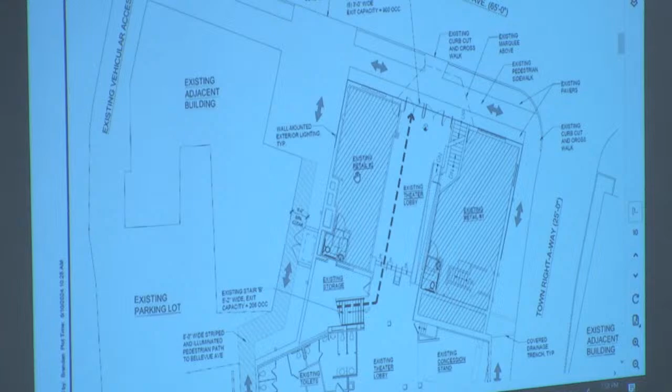So in the upper left-hand corner, that is the existing access to the parking lot in question, off of Bellevue Avenue. And on the screen here, hope you can see it.

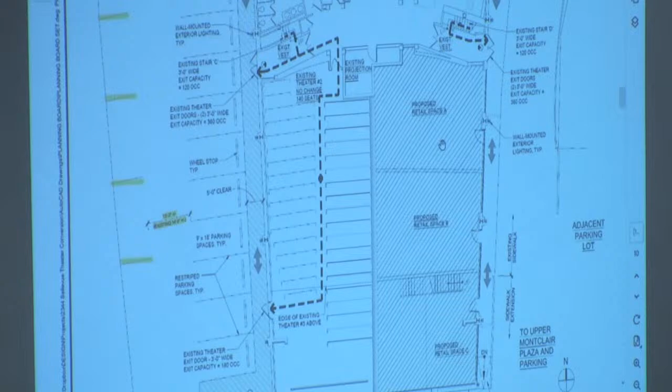So this is the edge of the theater, and the shaded area is the pathway that we have created by moving this parking spots over by 1.5 feet while maintaining the parking count and putting wheel stops and restriping the parking spaces. I believe one of the issues that we raised is that you can't have the parallel parking behind those 90-degree parking spaces. There's not enough, the aisle width is too narrow.

The existing measurement that we took out there was about 14.5 feet, and we're reducing it by like 1.5 feet down to 13. It's less than 15 feet, which, the township requires 24 feet minimum for 90-degree parking spaces. So the fact that the existing parking spaces may be provided with 14 feet, that's still not compliant.

If I may address that for a moment, we don't own that property, and we have no control over those parking spaces except for the ones that are by us. All I'm saying is you can't, I mean, it's actually less than 14 feet. A car cannot back out of those spaces without hitting the cars in the parallel. So I don't know if that's in your agreement with this parking.

Well, at the time we were negotiating the agreement, we were unaware of that. So I will certainly go back to the owners of that property and ask them about it. I would note that we don't require any parking at all. So if worse comes to worse, there'll be no parking, but I'm hopeful it would be better to have some parking for employees and residents.

I think the issue here is that not so much whether or not you're required parking, but it's that you're providing it. Well, I guess, should this board approve the application, we're basically signing off saying that that's okay, and there's no issue.

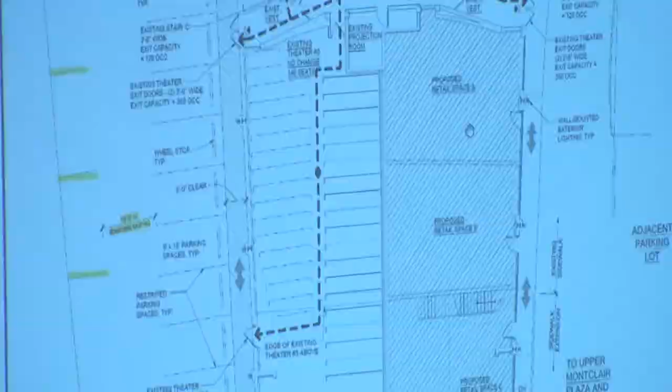Now, again, that agreement was reached prior to my being made aware that you wanted those parallel parking spaces removed. So I will have to go back to them and say that if they want to continue to park on our land and use those parking spaces, they're going to have to get rid of the parallel parking. And if I can't do that, I will notify the board that there will be no parking back there. That's all we can do. We don't own that property, so it is not for us to do.

I think I'm just a little confused. There appear to be 10 parallel parking spaces in the rear. Is that correct? I believe those are 90-degree parking spaces. There's what, 90-degree parking spaces, right? Yeah, these are 90-degree. And only then there's four. These are the parking spaces. Yes, there's only, I thought there was like 4. I think there's 4. Yeah, 1, 2, 3, 4. Okay.

3 or 4. So, but you're making reference to wheel stops. These are parking spaces as well. But can you explain it with the pointer so that everybody can follow along? Yeah, I was going to ask that, Janice, if we would put the pointer up there so... sure.

So this is one parking space, the 90-degree parking space, with these being the wheel stops along here. And then these are the parallel parking spaces in question. Our concern is vehicles entering or exiting those 90-degree parking spaces will not have enough room to safely back out or even potentially turn in without there being conflicts, as currently illustrated.

If the first space, for example, were left vacant, could you perform a K-turn using that? Or is the aisle width too narrow? I think it'd be really dangerous.

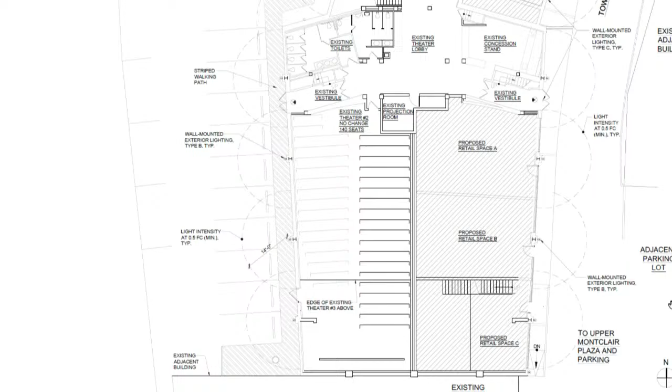With the parallel parking spaces there, at maximum there's 14 feet, and that's pushing it, and now we're talking about reducing it to 13 feet and change. And again, the town ordinance requires 24 feet, that's just industry standard. But to be clear, if they were to eliminate those spaces, we would not be in violation of any parking requirements.

I guess there's two options here. As Mr. Neiman pointed out, on-site parking is not required for the property if 50% or more of the building is used as a movie theater, correct? That's correct. And 50% or more will be used as a movie theater? Yes, correct. Okay, so this is more of a site plan issue.

I think it was created because the redevelopment plan states that there must be unobstructed pedestrian access outside of those doors. Now, the way you show it here, they show a 5-foot wide pedestrian aisle. The question I have is, do we need a full 5-foot aisle along the side of the building?

Well, I think they're proposing 5 feet, correct? We're proposing 5 feet. That's why we had to move the parking spaces back. Well, I'm just trying to be helpful, talking about options. So the options would be to reduce the width of the walkway, or to remove the parking.

Or, if you can, for safety, as long as we make sure that there's access where those doors are and pedestrians can go between the cars, it doesn't necessarily have to run along the side of the building. That way you can move the parking spaces closer to the building, but you have to design them so that you can get out through the doors.

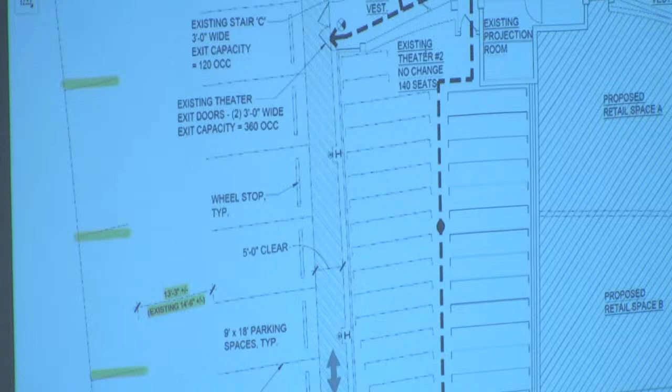Given how resident access is going to work, would there still be a pedestrian walkway on the top half, basically from the start of the parking, to give them an easier path rather than having to walk either through a darkened alley or around the other building through the parking lot?

There will be lights installed on the facade along the way here. Part of the access we created to link up Bellevue and the parking lot is to create this illuminated pathway. Perfect. Did you submit a lighting plan that shows that? Yes, it's on the following drawing, I believe it's A005.

Oh, that was not in the handout, I guess, because there's no changes to it. So, okay, it's on the screen here now. So there will be a series of lights here illuminating the path from Bellevue all the way to the parking lot on the west side.

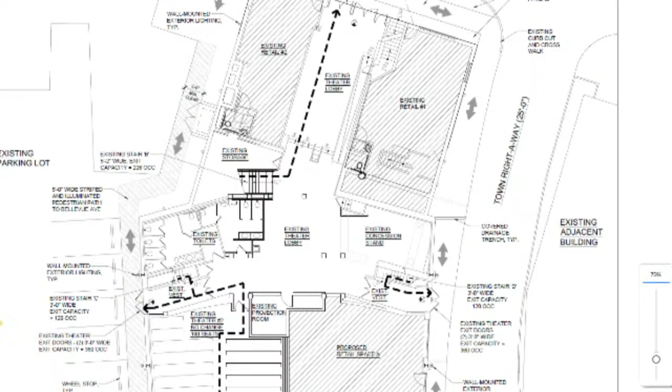So I don't think you've talked about the east side of the building or gone through the apartments. Should I just go over the drawings quickly? Absolutely, yeah. If you have any questions, just let me know. I know it's maybe a little bit hard to read on the screen.

So what you see here, this is the front of the building on Bellevue, and this is a stair that leads you up to the upstairs apartments, the 3 apartments that we're proposing. And then this is on the town right-of-way. This is the east side of the theater. What we are proposing is to put the retail space in what is currently Theater 1, opening up the walls to allow 3 separate retail spaces over there.

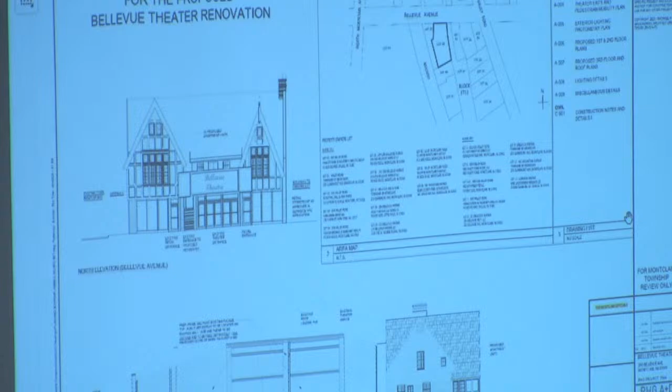We went over this with the HPC and adjusted based on their comments, as I mentioned before, maximizing the windows and putting a masonry bulkhead below the windows. This matches what is typical in that part of Montclair for storefronts. We also added these sash windows to match what's in front, to keep the same vocabulary.

And we noted the height of the lights, so they're all about 7 feet, more towards the north because the sidewalk slopes down, about 8 feet, right above the door. All the lights are at the same height, and all the lights are below 15 feet, as I previously mentioned.

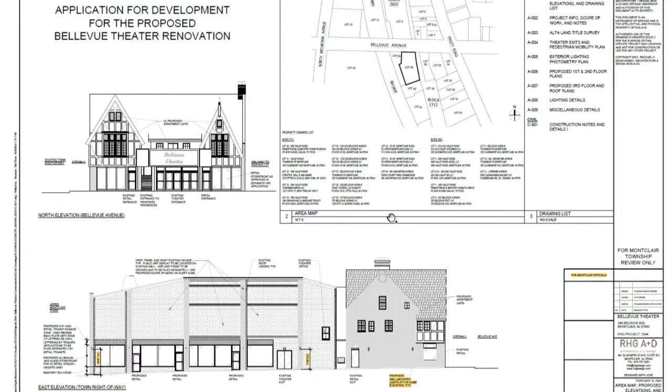On the second drawing, the only change compared to what we've shown before is we addressed Norberto's comment about where we're putting the snow stockpile, up against the building at the edge of the sidewalk, while maintaining a walkway for pedestrians. On the upper left-hand corner, this is where you can find the description for the mural and the proposed scope of work. Can you show the board members where the murals are proposed?

On the east side of the building, the future location of the mural would be on the facade above the retail spaces. I thought it was just one portion of that. We showed the entire facade to HPC back in April. So the whole thing's going to be a mural?

Yeah, or it could be a mural. Would it be flat? Because it looks like there are divisions. Those are existing structures that are separating it. So the anticipation would be that it would be flat for purposes of the mural? Yes, maybe it's up to the artist. Maybe they'll work all the verticals into the theme, but that's yet to be developed.

It's kind of a narrow driveway, so it couldn't extend out very far. I think the HPC, in previous iterations of this plan, had a lot of thought that it's a very ugly facade of that building. It's concrete block, and it would be preferable to make it a work of art. That was their suggestion initially.

That wasn't the HPC, but we agreed. I think we had seen previous plans with murals on the side of the building, and we had agreed that was a good idea. Yeah, I thought it was a great idea.

And by the way, the Economic Development Coordinator is willing to meet with you to talk about grants to do a mural program. Okay, great.

And the client's also interested in doing some public art on the other side of the building, the side that faces the railroad track. The iteration I saw had some concern that it might be a sign. Is that still under consideration? That was just for illustrative purposes.

This one might be a little hard to read. We put this in a couple submissions ago to show the circulation and how people can exit the theater, and to show that we have a continuous pathway around the building. The comments about needing to adjust the west facade are taken, so we'll make the update.

Which sheet is this? This is A004, the one we had looked at previously.

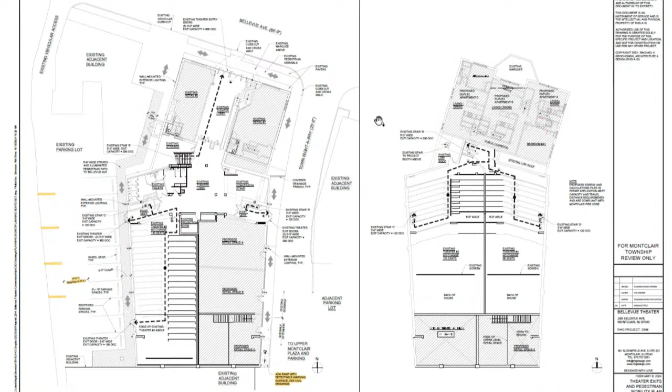And then the next one, A005, shows all the exterior lighting and the light level of each one shown on the plan. For the most part, we're meeting the township requirement of the 0.5-foot candle.

However, on the east facade, because the building's right on the property line, we'd likely need to ask for some kind of consideration here — a waiver, because there's no way for us to meet it given the building's position. And sorry, what was that waiver for? Just want to make a note — for the light intensity level.

Yeah, I believe the township allows a maximum of 0.3-foot candles along the property line. Isn't the maximum 0.5? But along the property line it's 0.3. Okay, along the property line, right.

And that was on the west elevation, you said? On the east elevation, yeah, on the town right-of-way side.

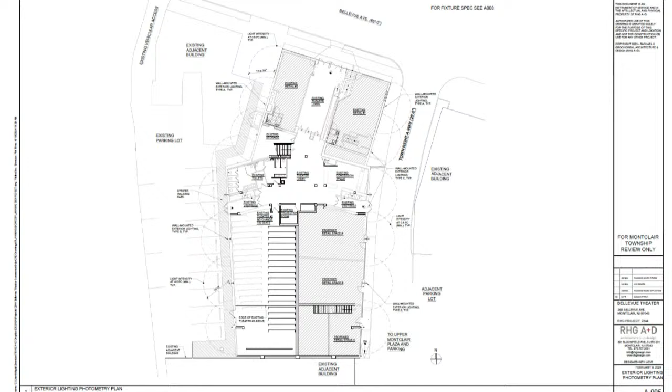And do we have any concern with that? Well, for the exceedance, given that it's along the driveway, I don't see an issue with that.

On the next drawing, A006, we're showing the 3 retail spaces and the 3 upstairs residences, the apartments. The only change we made was at the highlighted part, we adjusted the sidewalk to match the survey, the contour and shape of the sidewalk. There were questions about the widths - the existing width is 5 feet, and we're maintaining that, extending the sidewalk all the way to the southeast corner.

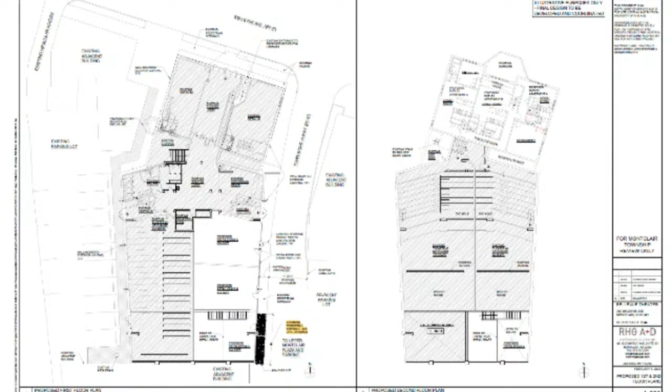We added a wheelchair ramp at the bottom. The following page shows the upper level, A007, the duplex units, the residential units, and also the rooftop units. The revision we made this past week was to add screening for the rooftop units on both sides. The exact height is to be determined once we know how big the units are, so we can match the height to make sure they're properly screened.

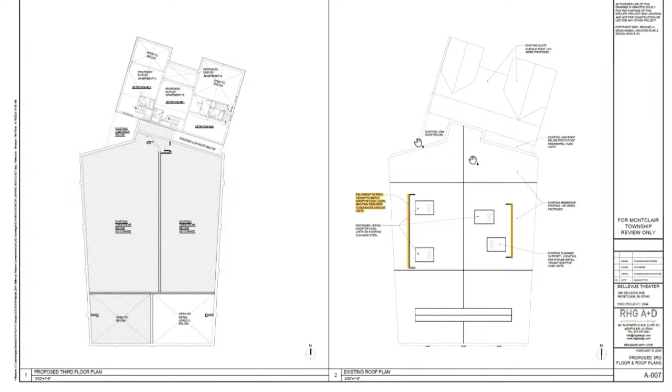Those units are for purposes of the apartments? These 3 units are for the theaters. This location would be for the retail spaces. For the retails, I see. Yeah, and the apartment units would be somewhere here on the low roof, concealed - you can't see them. So those units already exist, so we know how tall they are. These 3 we already know, but this here we don't know yet. So just to make sure that we do it in one shot and line them up. Okay, yeah.

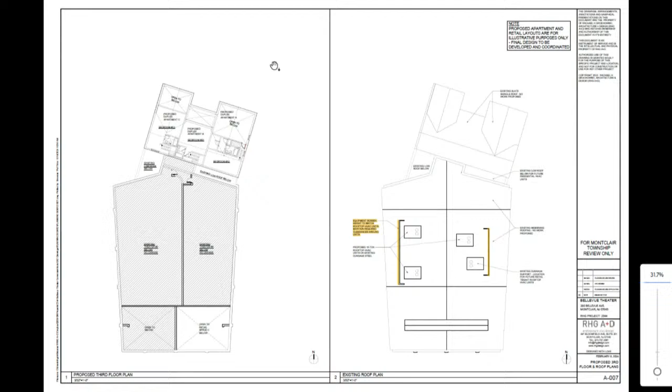And then the following page, A008, which we've submitted previously, shows the different lights we plan on using on the building facade to illuminate the pathway, and also to be over the emergency exit doors. Then A009 shows one of the typical rooftop units we're using for mechanical, the profile of the storefront we're proposing, the color, and also the construction of the dumpster enclosure.

We actually do require a roof over the enclosure. The concern is that the dumpsters are not always shut, particularly in a mixed-use area like this, where people can see the dumpsters from above. That's why our requirement is that there should be a roof over the top of the dumpster enclosure.

You might want to make it a little bit taller and put a roof on so you can actually get the dumpster in there. Now, correct me if I'm wrong, the section we saw was, if it's made of wood, then we need a roof, but if it's made of a different material - no, it doesn't matter. No matter what it's made of, it still needs a roof.

The concern is because we still want the dumpster to have lids, we'd probably need to raise the walls much higher to be able to open it on a daily basis. Well, I think you'd probably want to have the walls higher - people would be walking past there. It's only 5 feet tall.

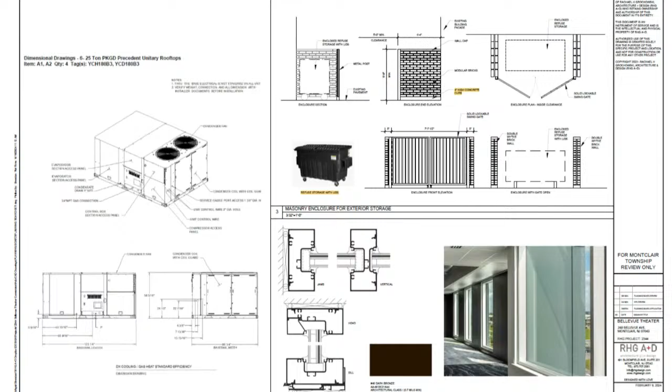And then the following is the engineer's drawings showing the various details that would address the comments we've received, including making the sidewalk thicknesses more - I think it was increased to 5 and 7 inches per Norberto's comments. And we're showing the expansion joints, the trench drain detail, the curb detail, and so on. That's a project.

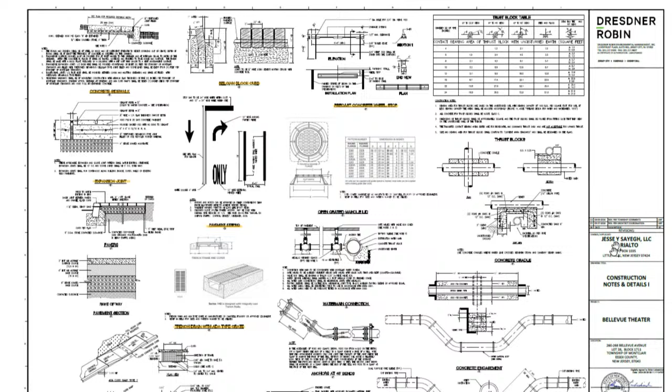So I have a question that's been bugging me ever since I started reviewing this plan. When I go to a movie theater, and I walk down the hallway from the box office to my movie theater, I can hear the movies - this pounding sound - as I'm walking down the hallway. Are people who are going to live in these apartment units going to feel the pounding of the movie sound? Is that something that's been taken into consideration? We haven't started looking into designing the units yet. We're just hoping to get approval for the change of use, then we'll start looking into it.

There are ways to mitigate what I'm hearing is probably from vibration. Yes. Would you excuse me for a second?

I would just inform the client that between the theater and where we're proposing to have the apartment, there's actually a 16-inch solid load-bearing wall. That should do the trick. That would help to mitigate, yes. Are there any further questions from the board?